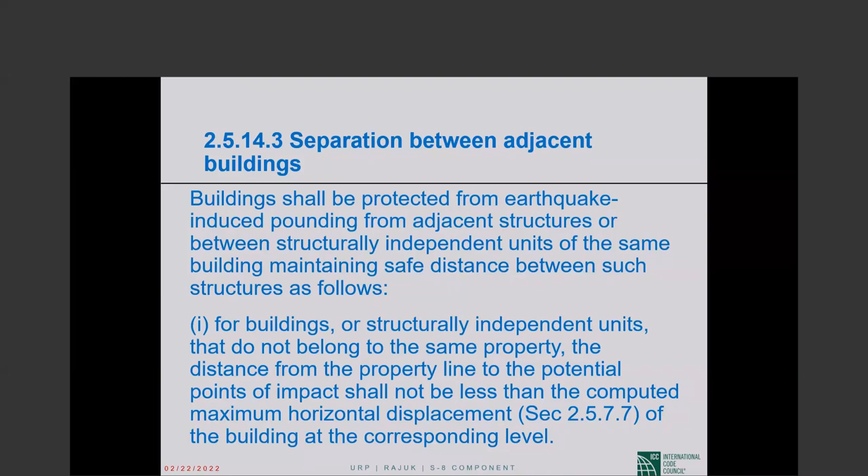The second item, for buildings or structurally independent units belonging to the same property, if the distance between them is not less than the square root of the sum of the squares of the computed maximum horizontal displacements of the two buildings or units at the corresponding level. So this is exactly the same as ASCE 7-10. Separation distance is square root of the sum of the squares of the deflection at the roof level of the shorter building and the deflection at the corresponding level of the taller building.

Okay. Now, this square root of the sum of the squares concept is in BNBC ahead of ASCE 7-10. I wanted you to see that. And once again, we are not talking about delta sub M1 of ASCE 7, including torsion. This is the horizontal displacement. It may not include torsion. Then that is what I found the most interesting, and the reason that I thought that I had to show all of this to you is item number 3.

If the floor elevations of the building or independent unit under design are the same as those of the adjacent building or unit. Okay, please let me read that again. So if the floor elevations of the building or independent unit under design are the same as those of the adjacent building or unit, the above referred minimum distance may be reduced by a factor of 0.7.

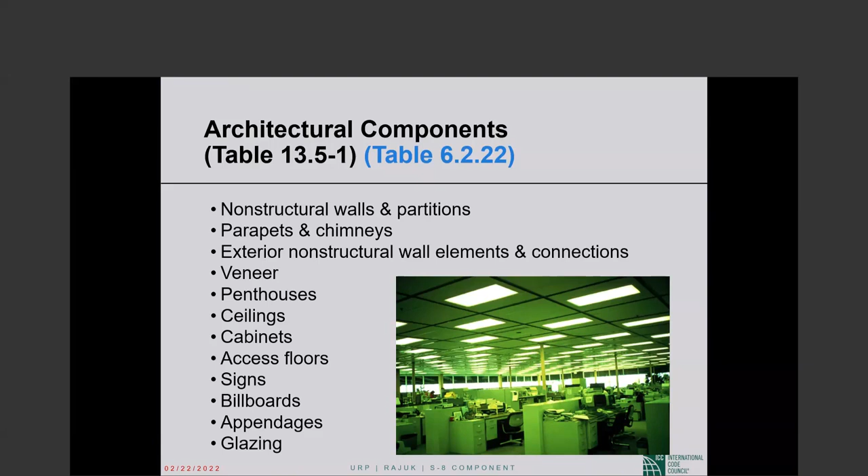Parapets and chimneys, these are roof-mounted chimneys. Exterior non-structural wall elements and connections, veneer, penthouses, ceilings, cabinets, if the cabinets are attached to the structure. Otherwise it will be treated as furniture, and furniture is typically not considered a non-structural component. It is when they are attached to the structure or braced against the structure that we do consider them. Access floors, signs, billboards, appendages of various kinds, and glazing or glass, a very important architectural component.

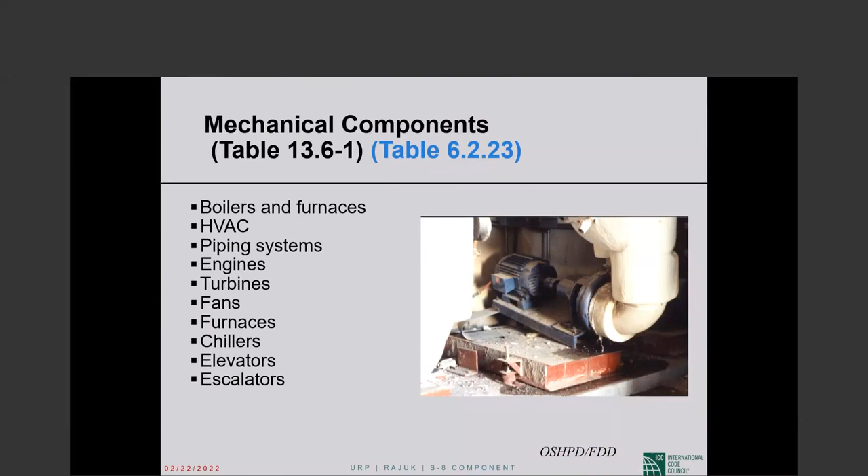Mechanical components are listed in Table 13.6-1, a very important table: boilers and furnaces, HVAC—heating, ventilating, air conditioning—could be ducts, could be equipment, piping systems, engines, turbines, fans, furnaces, chillers, elevators, escalators, all of that are mechanical components. Electrical conduits, bus ducts, cable trays, lighting, the lighting fixtures.

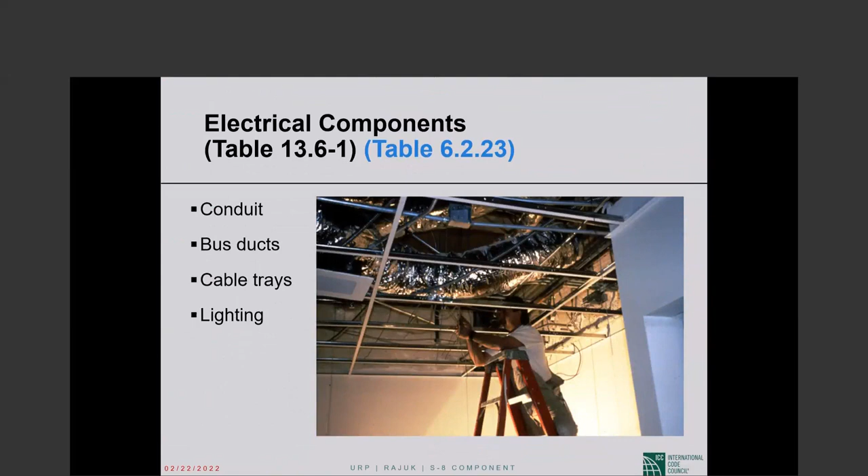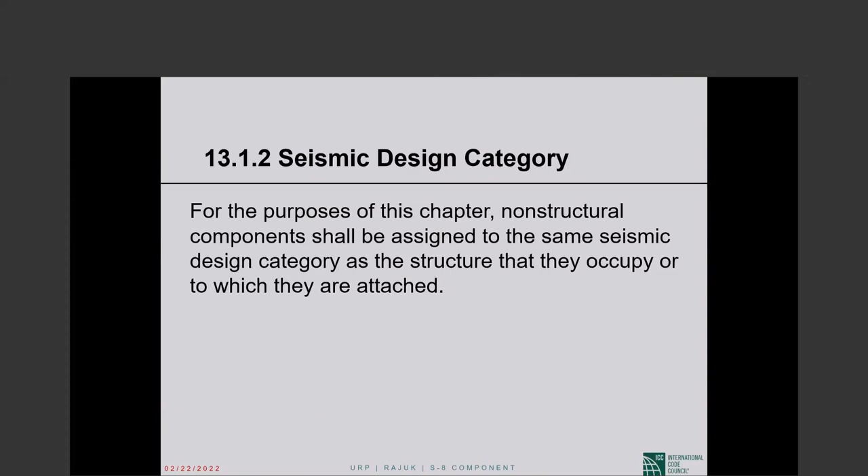Now, at the beginning of chapter 13, and the same is true in BNBC—in BNBC it is 2.5.15, as you see—there are a number of exemptions.

That's pretty much where the chapter starts, where the requirements do not apply. And that is a very important list because it is only the other non-structural components that you need to design using chapter 13. So there is, to start with, a list of non-structural components that need not be designed using chapter 13 of ASCE7 or 2.5.15 of BNBC 2020.

Okay, so this section establishes minimum design criteria for non-structural components that are permanently attached to structures and for their supports and attachments. So this is non-structural components permanently attached to the structures—this is not furniture, as I said—and for the supports and attachments of those non-structural components. If they're attached to the structure, the attachment has to be designed.

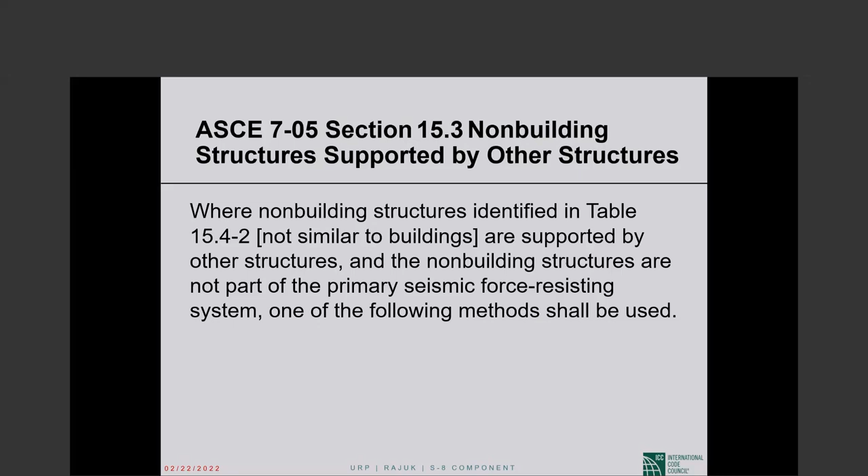So where non-building structures that are not similar to buildings are supported by other structures, okay, could be a chimney, and the non-building structures are not part of the primary seismic force resisting system, then one of the following methods shall be used. I'll take you only through the first part. The second part is a little too complicated, and I'll leave it to you to read if you're interested.

For the condition where the weight of the non-building structure, so we are talking about a non-building structure supported on another structure, for the condition where the weight of the non-building structure is less than 25% of the combined weight of the non-building structure and supporting structure...

Okay, this is the important part. Where the weight of the non-building structure is less than 25% of the combined weight of the non-building structure and supporting structure, the design seismic forces of the non-building structure shall be determined in accordance with Chapter 13. See, this is where it sends you. Chapter 15 sends you to Chapter 13, where the non-building structure has a weight that is less than 25% of the combined weight.

So it shall be determined in accordance with Chapter 13, where the values of R sub P and A sub P shall be determined in accordance with Section 13.1.5, which we looked at. Anyway, the rest of it may or may not be all that terribly important, and I will not take you through the case where the non-building structure weighs more than 25% of the combined weight.

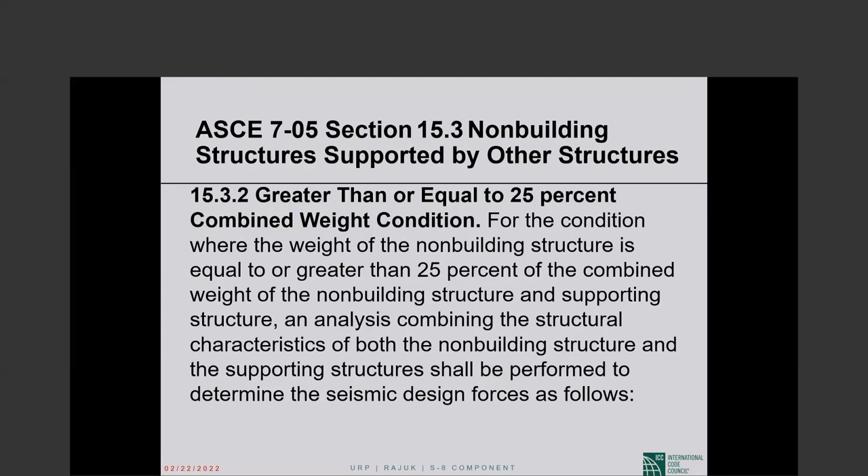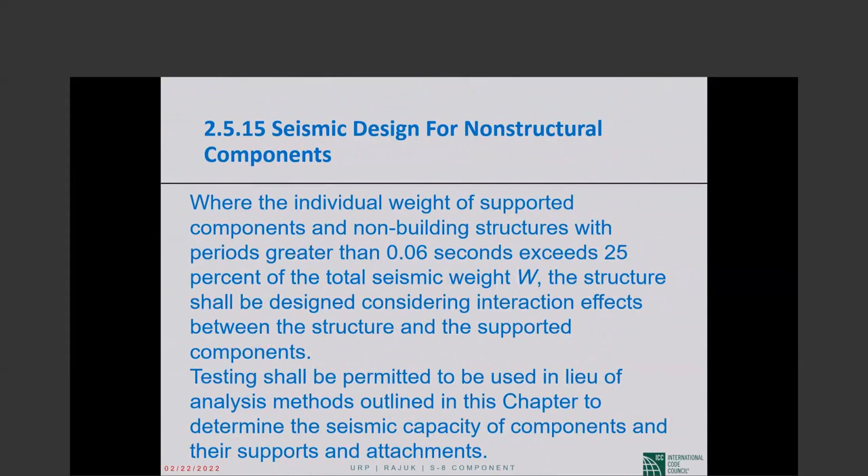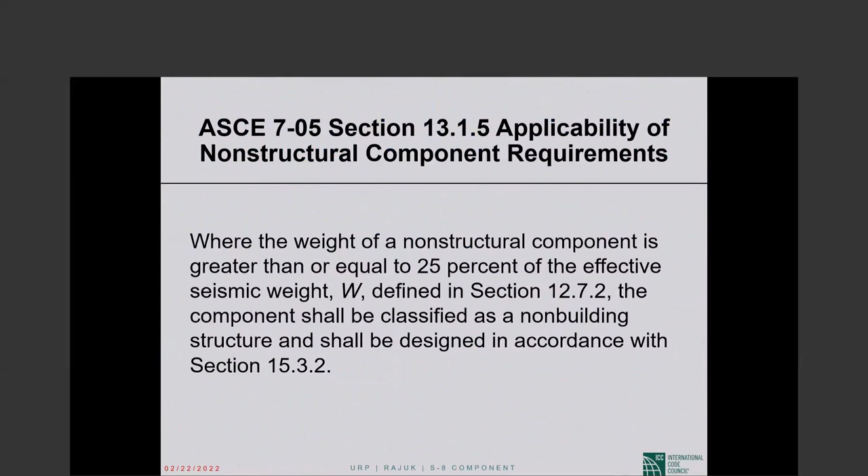So where the non-building structure weighs more than 25% of the combined weight, I will not take you through that, but there is provision for it. I wanted you to see that, instead of this vague provision in BNBC 2020, ASCE 7 has very clear, distinct provisions for both non-structural components and non-building structures. These are kind of interrelated, and I think that's probably enough on this topic.

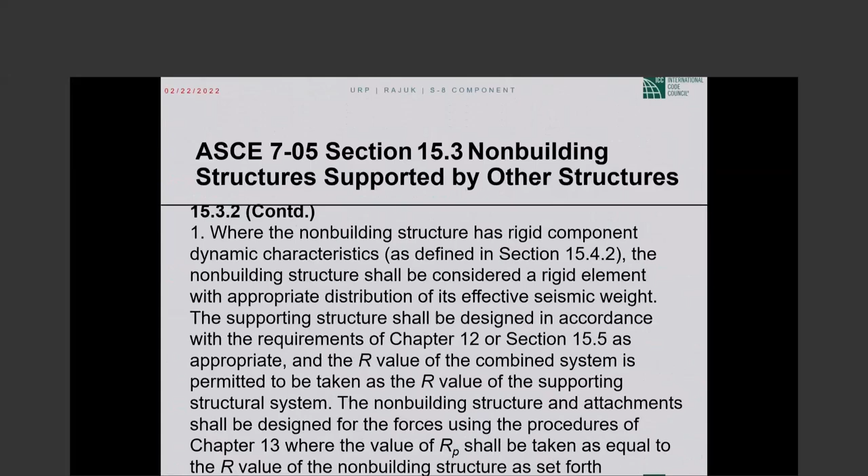But the exemptions are very important, and what I just took you through is also important. You cannot start designing a non-structural component without figuring out if it is exempt, because then you'll be wasting time. Also, you cannot start running numbers until you've figured out some of the things we discussed, like whether the non-structural component is too heavy, in which case we may have to go to chapter 15 for our design, not chapter 13.

With those things settled, let us get into chapter 13, the non-structural component design chapter. If you consider the exemptions, then what that leaves for us to design are parapets in design category B, all parapets, and architectural components in design category B when I sub P is larger than 1.

So in seismic design category B, the only architectural components that we need to design by chapter 13 are parapets and architectural components with I sub P larger than 1. If the design category is C, all architectural components must be designed by chapter 13. Electrical and mechanical components must be designed, but only if I sub P is larger than 1.

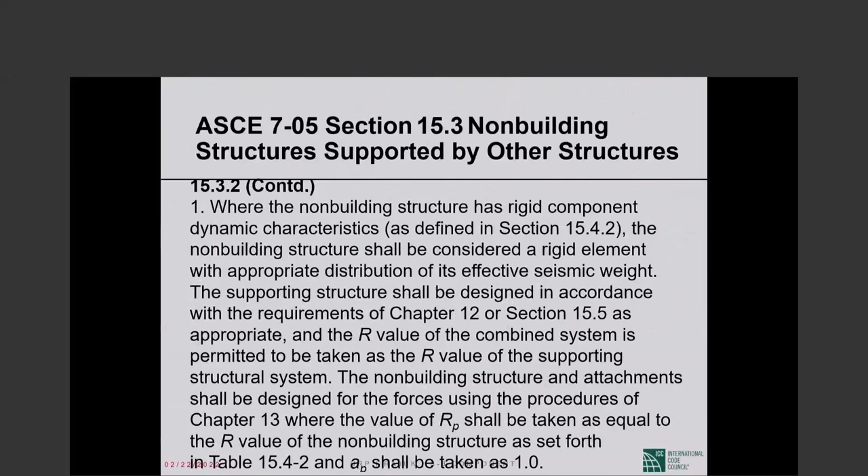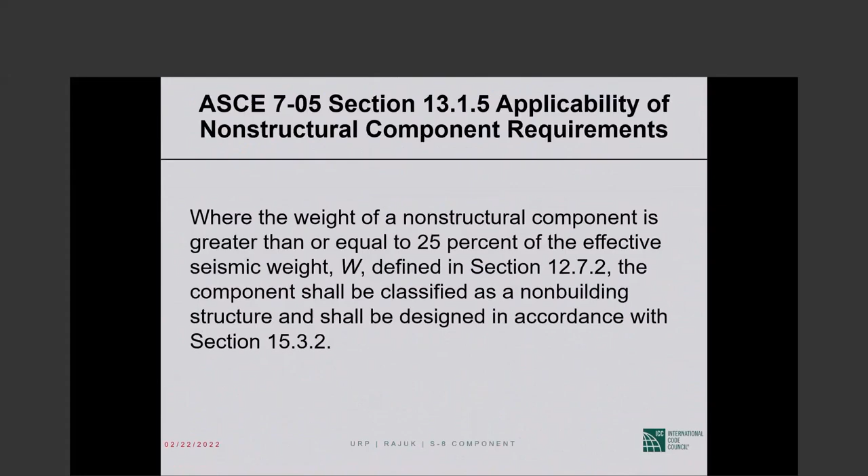Design categories D, E, and F: architectural, mechanical, electrical, all non-structural components basically always shall be designed by chapter 13. We say basically always because there were those exemptions 4 and 5, remember? These exemptions are there for the high seismic design categories, but those are not broad exceptions, they're kind of narrow. So this is why we say basically always.

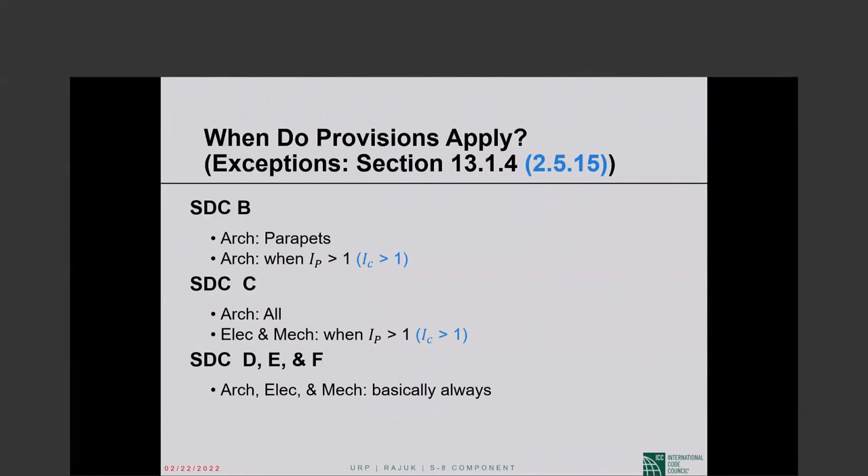So design category B: parapets have to be designed using chapter 13, other architectural components provided I sub P is larger than 1. Design category C: all architectural components, electrical and mechanical only when I sub P is larger than 1. Design categories D, E, and F: basically all architectural, mechanical, electrical components.

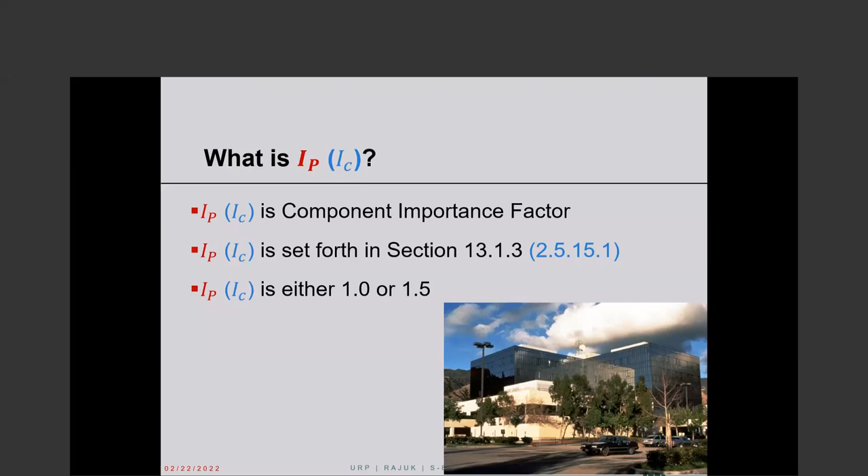Now the I sub P that keeps coming up - as you have seen, it is very important. It dictates many times whether we have to design a component by chapter 13 or can forget about design. I sub P is the component importance factor, given in section 13.1.3 of ASCE 7. I've given you the corresponding BNBC section number. I sub P is either 1 or 1.5. I for the structure can have 3 values: 1, 1.25, or 1.5. I sub P for parts and portions has only 2 admissible values, 1 or 1.5.

This is the section where you determine I sub P, component importance factor. The factor shall be taken as 1.5 if any of the following conditions apply: 1, the component is required to function for life-safety purposes after an earthquake, including fire protection sprinkler systems. 2, the component contains hazardous materials which when released can do harm to the public. And 3, the component is in or attached to an occupancy category 4 structure - those are essential facilities and hazardous facilities - and is needed for continued operation of the facility, or its failure could impair the continued operation of the facility.

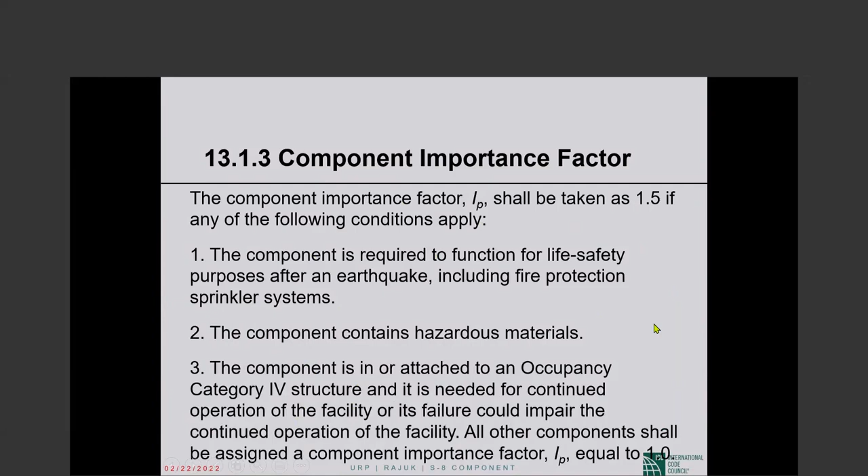I sub P shall be taken as 1.5 if any of those conditions apply. All other components shall be assigned an I sub P of 1. So I sub P is 1.5 when those conditions are met - it's not exactly an essential facility, but the component is needed for continued functioning of a facility. The language is clear. Otherwise, I sub P is equal to 1.

What force do you need to design a component for? The component design force is F sub P. That notation is common between ASCE 7 and BNBC, F sub P.

Maybe it is F sub C, in BNBC. So the component design force is 40% of S sub ds. S sub ds, remember, is short period design spectral acceleration. If we divide that by 2.5, or multiply it by 0.4, we get design level peak ground acceleration. This we have discussed many times before. So we are talking about the peak ground acceleration

multiplied by a dynamic amplification factor, A sub P, times the weight of the component, W sub P, divided by R sub P, component response modification factor, and then I sub P is the importance factor we have been talking about. So it's basically 0.4 S sub ds times W sub P, the peak ground acceleration multiplied by the weight of the equipment.

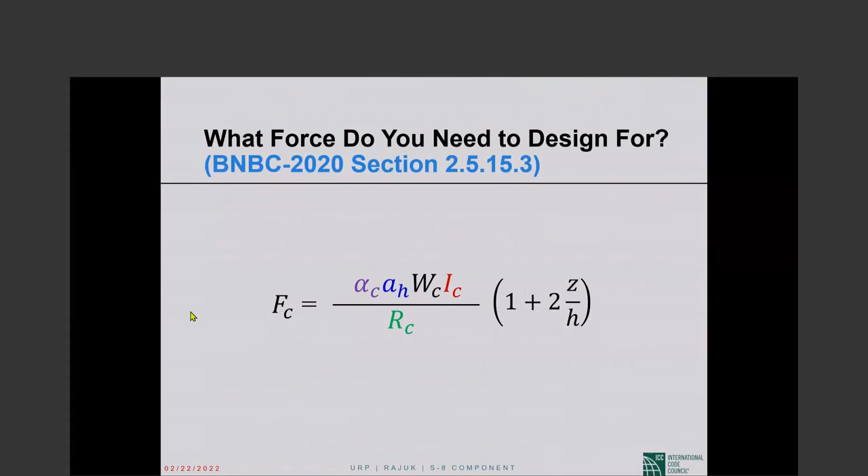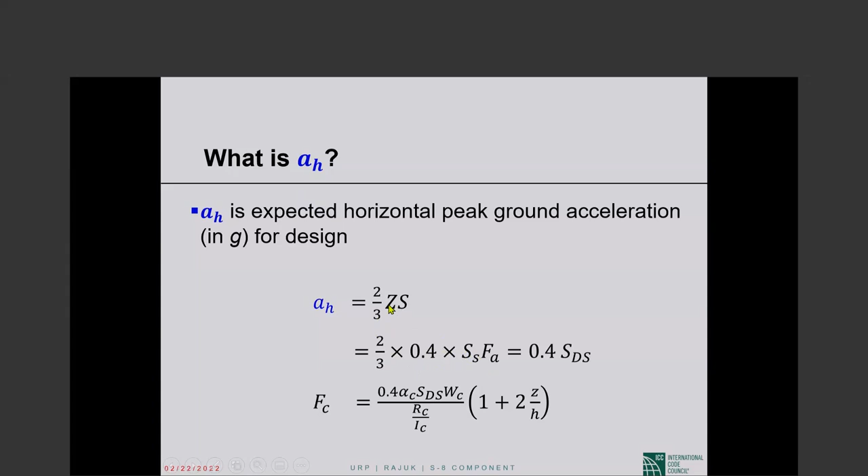And then 1 plus 2 Z over H is the same as in the ASCE7 formula. So this A sub H takes the place of 0.4 S sub ds, and here I'm showing you that that is the case. A sub H, in fact, is equal to 40% of S sub ds. A sub H in BNBC is given by this expression, 2/3 Z times the soil factor S. The soil factor S of BNBC is F sub A of ASCE7, and the Z is 40% of S sub S. Z is MCE level acceleration. This is why it is 40% of S sub S, not S sub ds.

So 2/3 of Z, which is 40% of S sub S, times the soil factor S, which is the short period site coefficient F sub A, and all of that, 2/3 of S sub S times F sub A, is S sub ds. So A sub H is actually equal to 40% of S sub ds. So there is absolutely no difference between the BNBC formula and the ASCE7 formula, if you remember that alpha sub C is A sub P, and in all other cases, the subscript C is subscript P of ASCE7.

So what is A sub P? That's the dynamic amplification factor. It is given in table 13.5-1 for architectural components and table 13.6-1 for mechanical and electrical components. R sub P is given in those tables, and A sub P is also given in those tables, 13.5-1 for architectural, 13.6-1 for mechanical and electrical. A sub P is either 1 or 2.5, with just one exception, just so that you know. There is either no dynamic amplification or there is significant dynamic amplification, 1 or 2.5, with one exception. I did not reproduce table 13.5-1; it is easy enough for you to look up. I think I gave you the corresponding BNBC table number.

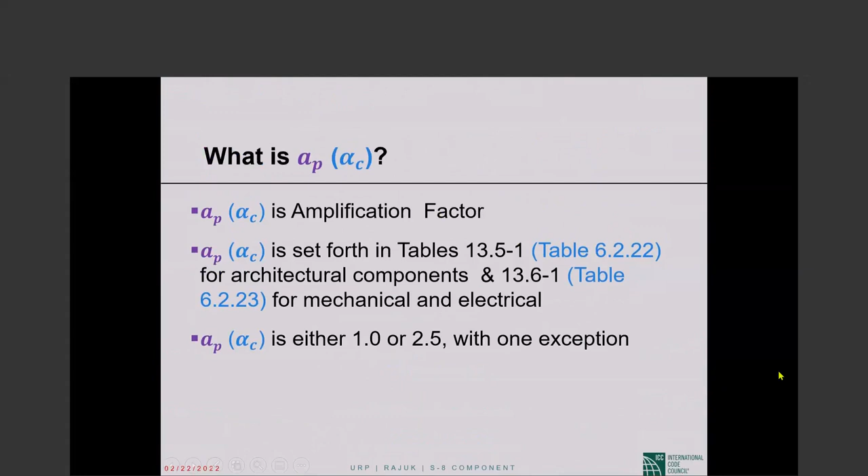Anyway, that's where it comes from, and it is 1 or 2.5. That's obviously important.

Okay, now we will discuss the variation along height that we, in a way, already discussed. So at the base of the structure, the peak acceleration is 40% of S sub ds. I said base of the structure, technically 40% of S sub ds is at the ground level. Base is a defined term in ASCE 7.

This is where seismic forces are imparted to the structure. Seismic ground motion is imparted to the structure. This is how it is defined. It is up to the engineer to decide what the base of his structure is.

Now, if it is a structure on level ground, the ground level is typically chosen as the base. But 40% of S sub ds is peak ground acceleration, and that would typically be the acceleration at the base.

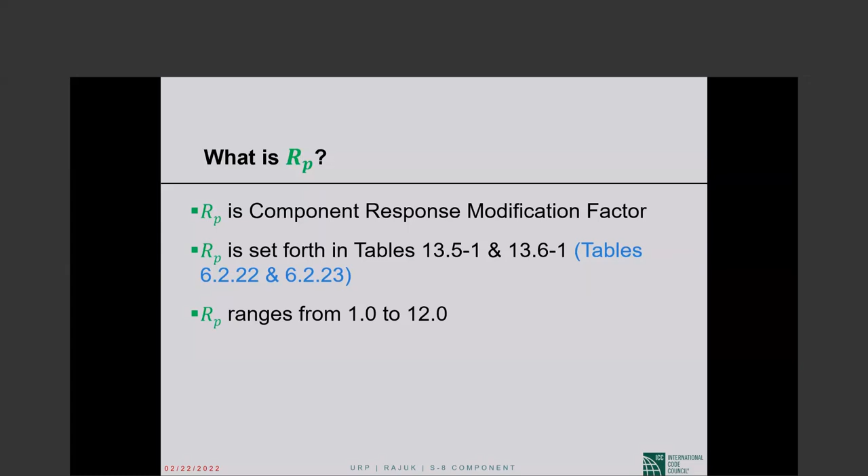Okay, so in those tables, the architectural, mechanical, electrical components that I showed you earlier in the 3 earlier slides are listed, and their A sub P and R sub P values are given.

Now ASCE tells you a couple of things that you need to understand and keep in mind, and same language or very similar language is also in BNBC. The force F sub P shall be applied independently in at least 2 orthogonal horizontal directions in combination with service loads associated with the component as appropriate.

That's what should be done. But when you are designing a parapet, it is the out of plane direction that counts. In plane, this F sub P will not do anything. It will basically have no consequence.

It's a long thing. Anyhow, I want to say that in principle, yes. In reality, it may, depending upon what you are doing, it may not be necessary to apply the force, as it says, in at least two orthogonal horizontal directions.

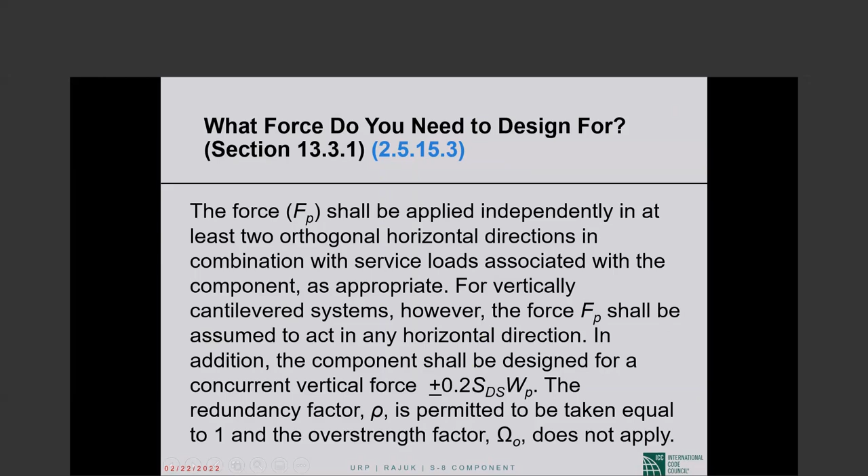What you are designing will dictate exactly how you implement that requirement. Where non-seismic loads on non-structural components exceed F sub P, such loads shall govern the strength design. So let's say on a parapet you have out of plane wind, you have the F sub P acting out of plane. The wind may very well govern in high wind areas, and you will design for strength required for the wind, no question about it.

Okay, so where non-seismic loads on non-structural components exceed F sub P, such loads shall govern the strength design, but the detailing requirements and limitations prescribed in this chapter shall apply. And this is like structure. The strength will have to be whatever requires the strength, but if your seismic design category is high, it will do the required detailing.

Okay, so component design force. I hope the requirements are clear. It's actually conceptually without any complication, as far as I'm concerned.

40% of S sub DS is the peak ground acceleration, design level peak ground acceleration. We multiply that by the weight of the component. So mass times acceleration is a force. That's what we get. We have our component design force. That's the basic part: 40% S sub DS W sub P.

Now there is a possible dynamic amplification depending upon what we are designing. Dynamic amplification would be like higher mode effects. And there is the possibility of a response modification factor if the response is going to be inelastic. That's where A sub P and R sub P come from. I sub P makes sure that we design important components for higher force.

It's that simple. If a component is going to be needed for fire recovery after an earthquake, we better design it for 1.5 times the force that we would use in the design of ordinary components. And then all of that gives us the connection force for a piece of equipment mounted on ground.

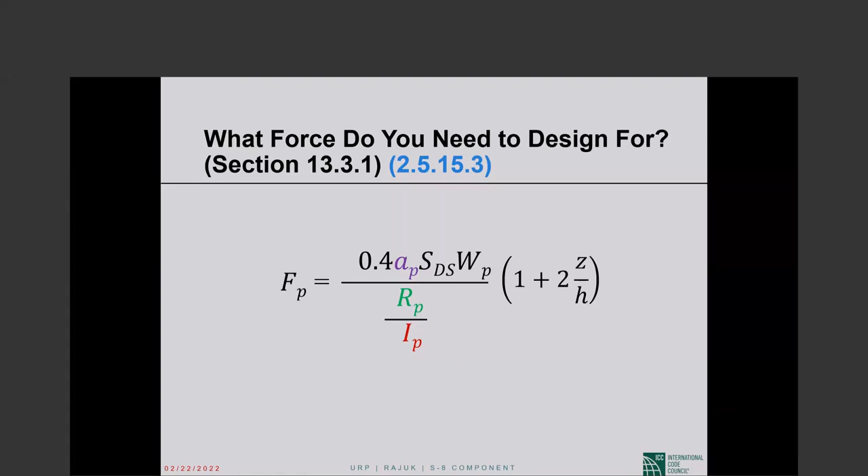Okay, so the equation makes basic sense. The A sub P and R sub P are given in tables, making it easy. And I sub P determination we have talked about. So there is not much else that is in ASCE 7 or BNBC.

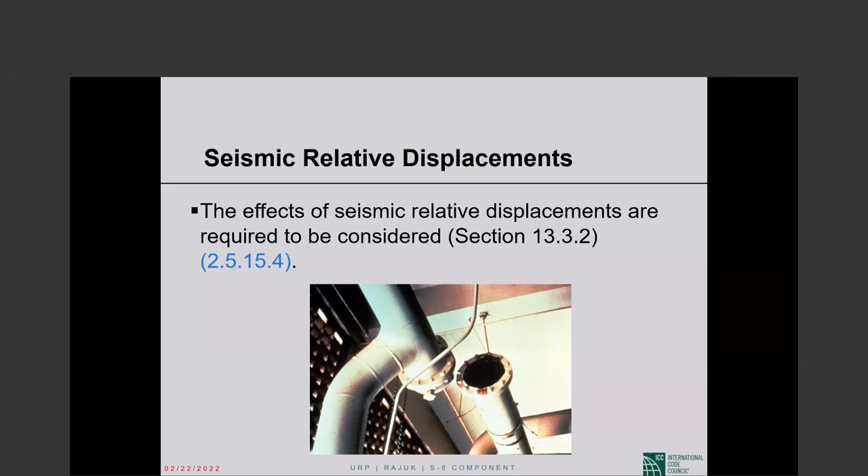Now that is the force. There are some things like piping and so forth where the component design force is not important. What is important is seismic relative displacement that has to be accommodated by the piping or whatever we are designing. The effects of seismic relative displacements are required to be considered. That's what section 13.3.2 of ASCE 7 says, and the corresponding section number in BNBC is that.

So this is section 13.3.2. The effects of seismic relative displacements shall be considered in combination with displacements caused by other loads as appropriate. So it's not only seismic that may cause displacements. Other loads may also, so we consider it in combination with displacements caused by other loads.

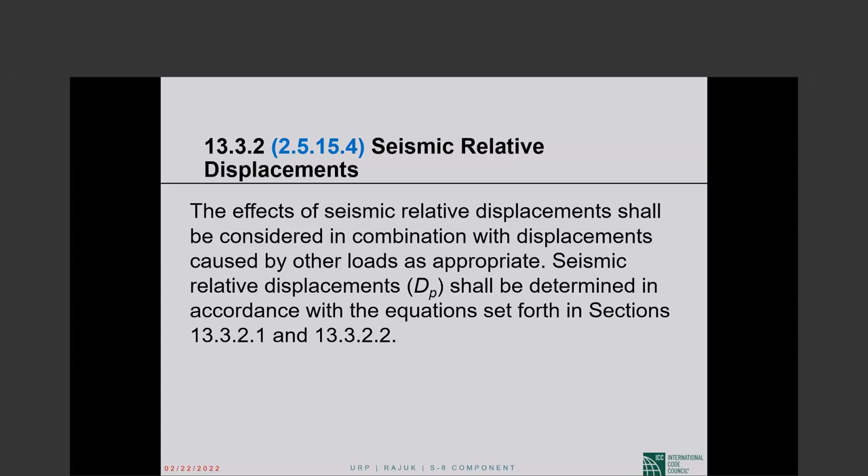Seismic relative displacements, the notation is capital D sub P, shall be determined in accordance with equations set forth. So equations are given for D sub P. This is very likely D sub C in BNBC. Okay, so please follow this.

So for 2 connection points on the same structure A, piping or whatever we are designing is attached to the same structure at 2 connection points, one at a height h sub x and the other at a height h sub y. D sub P shall be determined as delta sub x A minus delta sub y A. A is for the structure. So D sub P is delta sub x minus delta sub y, as simple as that.

For 2 connection points on the same structure, one at a height h sub x, the other at a height h sub y, D sub P shall be determined as delta sub x minus delta sub y.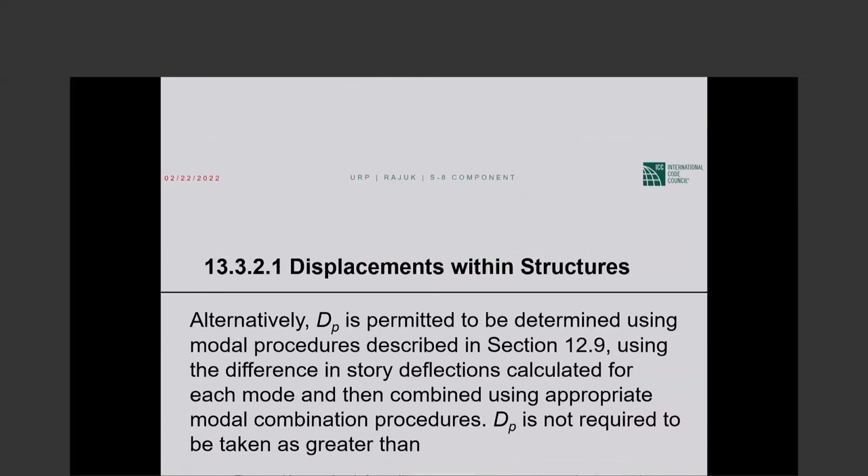Alternatively, D sub P is permitted to be determined using modal procedures described in section 12.9. I took you through one full day on modal analysis, remember. Using the difference in story deflections calculated for each mode, then combined using appropriate modal combination procedures. D sub P is not required to be taken as greater than, okay?

So D sub P you calculate, and D sub P is not required to be taken any greater than—or simpler language would be, D sub P need not be any larger than. Let's see what this is. H sub X is the height to the first attachment point, H sub Y is the height to the second attachment point. So H sub X minus H sub Y is the vertical distance between the 2 points, okay?

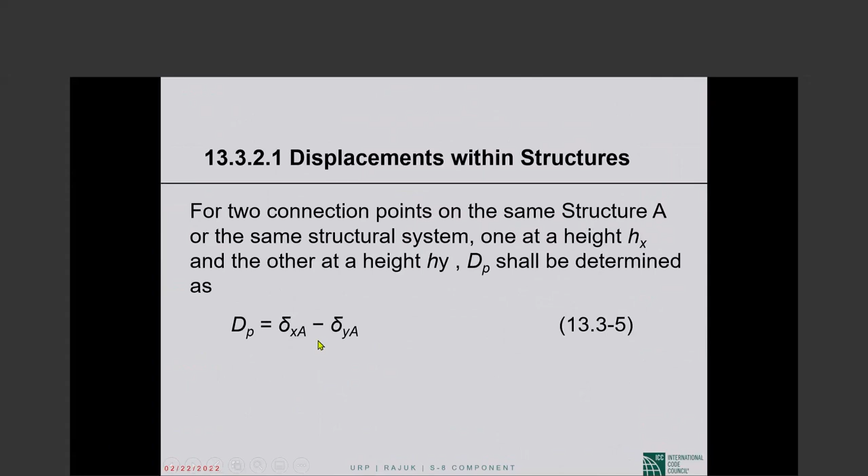So D sub P you will calculate as here, or by modal analysis procedure, but it need not be taken any larger than the right hand side. So that is attachment to the same structure.

For two connection points on separate structures A and B, one at a height H sub X and the other at a height H sub Y, D sub P shall be determined as the absolute value of delta sub X, which is on structure A, and delta sub Y, which is on structure B. So we have the attachment point at H sub X moving, and the attachment point at H sub Y also moving. We take the horizontal movements and sum them up, as absolute values, because the movement is in both directions.

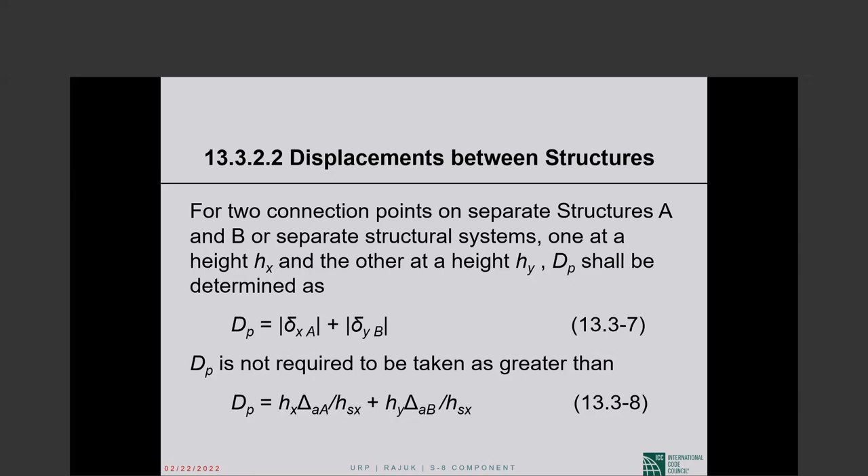We take the absolute values of the two and add them together. This D sub P need not be any larger than, same thing, we take the deflection limit, the allowable interstory drift, divide that by the story height, multiply by H sub X. H sub X is the height to where the first attachment is. Similarly, we take delta sub AB, the allowable story drift of structure B, divided by the story height, multiplied by the height to the point where the second attachment point is. I think if you read this, it will be clearer than I probably was able to make it. I think everything makes sense when you read.

So a component has to be designed for the force that we looked at. Depending upon the component, a more critical combination consideration may be that you will have to accommodate the relative displacement D sub P when you design glazing or glass. It is the relative displacement that becomes important. That has to be kept within tolerable limits given in ASCE 7. So whether the force or the displacement is more important depends on what it is that you are designing.

And then the attachment of the non-structural component to the structure, that obviously is important. You have to design that attachment as well. So the section is 13.4 in ASCE 7, 2.5.15.2 in BNBC. I took the first two lines from BNBC because it's simpler, and then ASCE 7 language, which is very, very similar to what you have in BNBC. Components shall be attached such that the component forces are transferred to the structure. Very simple, conceptually and practically, that's what we have to do.

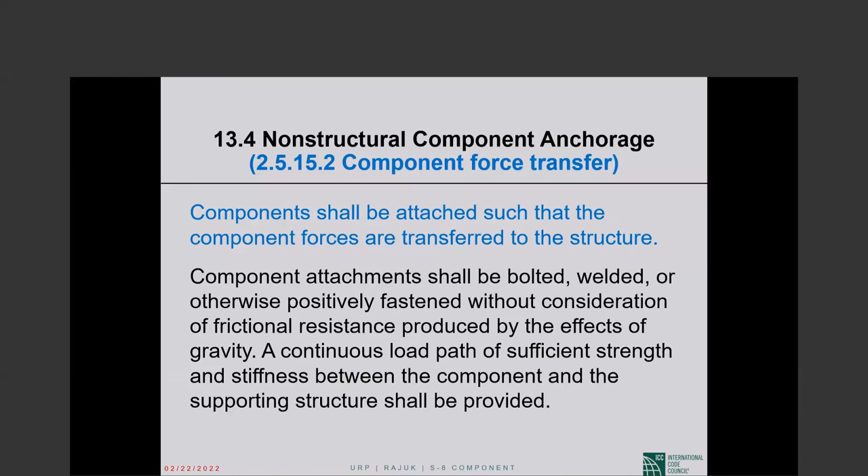The section goes on, and this part may be a little less simple to quickly follow. So local elements of the structure on which the component is attached, it could be anything, but it is not the main columns, beams, shear walls. Local elements of the structure, including connections, shall be designed and constructed for the component forces where they control the design of the elements or their connections. It's not always that the force is controlling, it could be deformations, but anyway, the component forces shall be those determined in the section such and such.

We looked at that, except that modifications to F sub P and R sub P due to anchorage conditions need not be considered. So you take the component forces calculated from the formula that I showed you. Modifications to F sub P and R sub P due to anchorage conditions need not be considered. The design document shall include sufficient information relating to the attachments to verify compliance with the requirements of this section. Anyway, this may require more than one reading, but there is nothing that I think is confusing.

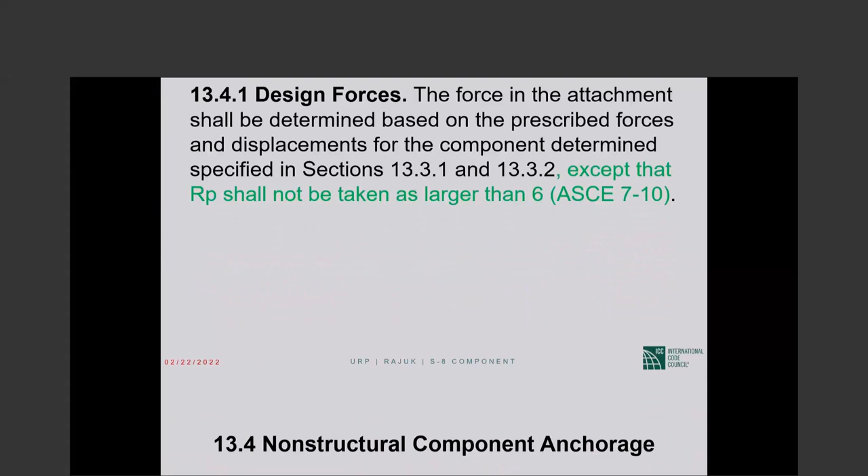The next subsection, very important under attachments, is anchors in concrete or masonry. Masonry I have not reproduced, but for anchors in concrete, ASCE 7-05 has 4-5 provisions. If you read them, you are liable to be confused. In ASCE 7-10, we switch to this requirement: anchors in concrete shall be designed in accordance with Appendix D of ACI 318, the anchorage appendix. Anchoring to Concrete is the title of Appendix D.

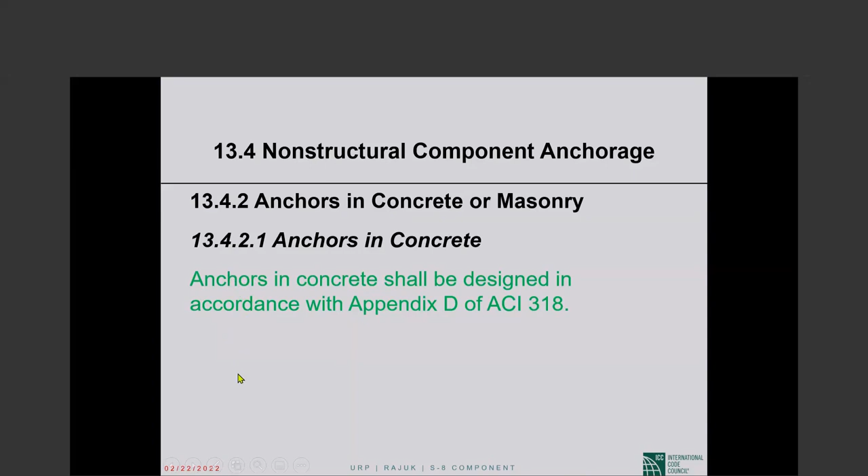So that takes care of everything that ASCE 7-05 was telling us to do. This is a very, very important requirement when you attach a non-structural component to a structure. The anchors shall be designed using ACI 318 Appendix D, and that will give you ductile anchor failure. ACI insists on the steel failing rather than concrete in anchor design, and the steel failure has to be ductile failure. There are a couple of alternatives to that, but that kind of failure mode is very, very important. So to me this is an extremely important requirement, that the anchors must be designed by ACI 318.

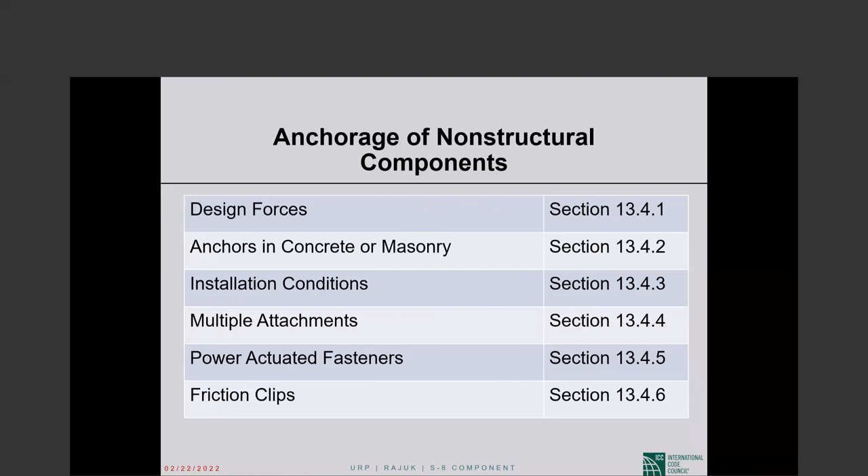Now, beyond anchor design forces, for anchors in concrete or masonry, there are other provisions you need to look at in ASCE 7: installation conditions, multiple attachments, power actuated fasteners, and even friction clips. There is good commentary on friction clips with a picture - good ASCE 7 commentary. So as far as anchorage of non-structural components, there is quite a bit said in ASCE 7-05.

In ASCE 7, a big item is special certification. I didn't quite find it in BNBC - that doesn't mean it is not there, I may not have found it. Special certification is required for many equipment. Let's look at this. Hospital equipment - a hospital will not buy equipment that does not have special certification on it. It's as simple as that. So this is a very important requirement of ASCE 7 that is adopted by the IBC and practiced across the United States.

So where in the code do you find special certification requirements? In ASCE 7-05, it is section 13.2.2. This is in the IBC as well. I went back to 2009 IBC because that's more like BNBC 2020, and the section where you find special certification is 1708.4. Chapter 17 is on inspection and testing.

What does certification apply to? For what do you have to have special certification? Design category C through F, mechanical and electrical equipment with I sub P larger than 1. This is very, very important stuff. Design category C through F, mechanical and electrical equipment, all mechanical electrical equipment that has I sub P larger than 1. Also, design category C through F components with hazardous contents that have I sub P larger than 1.

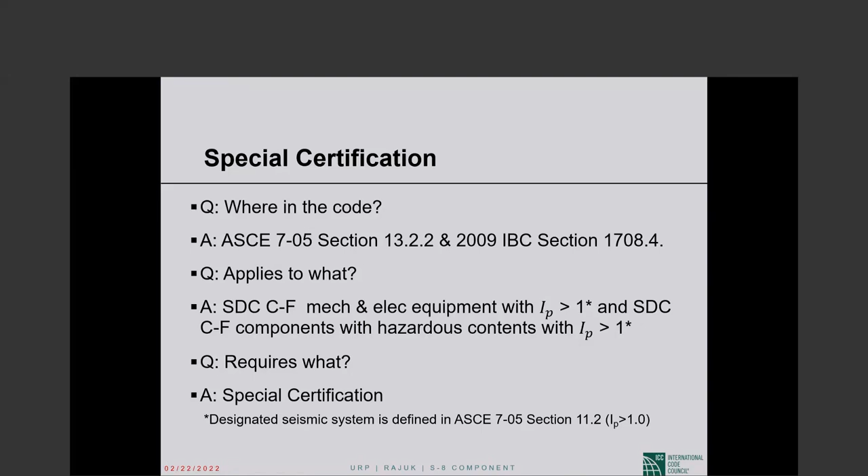So what is required for special certification? What basically is this special certification? For mechanical and electrical equipment, show that the equipment remains operable following design earthquake, and this showing has to be by shake-table testing in accordance with such and such, experience data in accordance with 13.2.6, or analysis. So the basis can be shake-table testing, experience data that would be acceptable to the building official, or analysis.

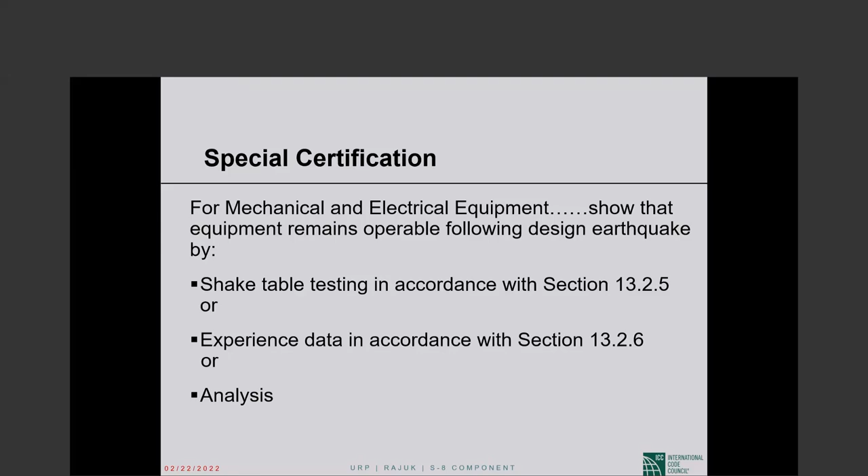The analysis choice is kind of restricted - you cannot always use it. But anyway, the purpose of the shake-table testing and so forth is to show that the equipment remains operable following design earthquake. The special certificate will state exactly that. For components with hazardous contents, show that containment is maintained - the material will remain contained following design earthquake. And you shall also show this by shake-table testing, experience data, or analysis.

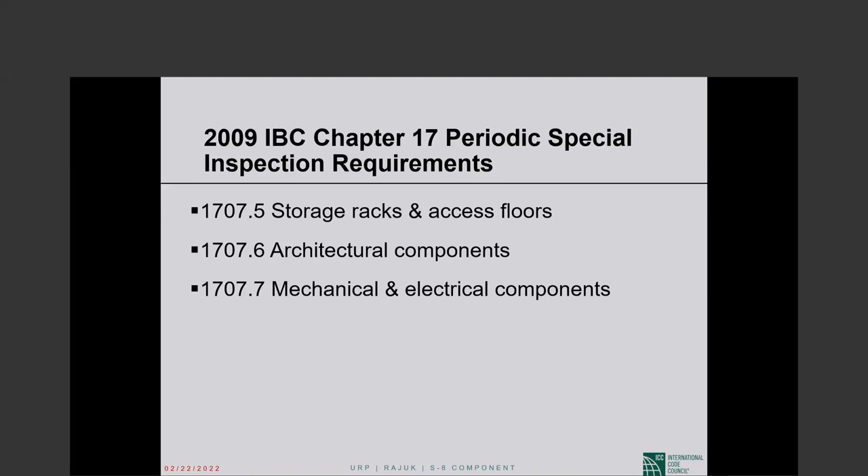On top of everything we discussed, IBC has special inspection requirements for some of this stuff. For storage racks and access floors, periodic special inspection is required—periodic meaning from time to time as opposed to continuous. For architectural components, also periodic special inspection. And for mechanical and electrical components, periodic special inspection. I have given you the IBC section numbers—those are 2009 IBC section numbers—so you can see what the requirements are.

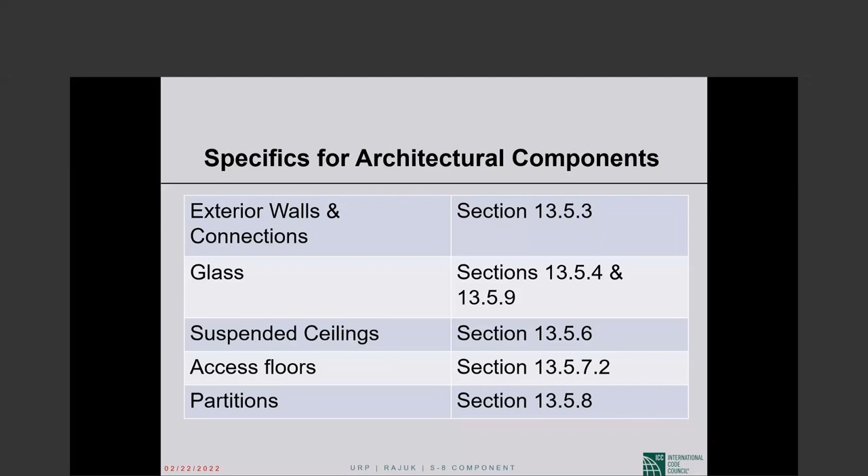So it is a pretty comprehensive package. Beyond the general requirements—the design force, the relative displacement, the tables giving us A sub P, R sub P—there are specific requirements for many non-structural components in chapter 13 of ASCE 7. Those things for which we have specific provisions are exterior walls and connections, glass, suspended ceilings, access floors, partitions. Those are all architectural components. Mechanical and electrical components for which we have specific provisions in ASCE 7-05 are utility and service lines, HVAC ductwork, piping systems, boilers and pressure vessels, elevators and escalators.

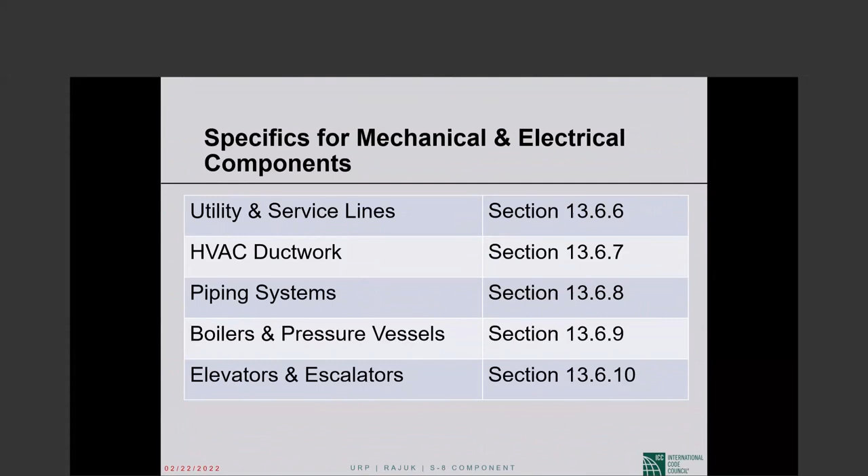Okay, so that brings us to a point that is, I think, very logical for our break. We will come back at 9:35 precisely and go into the non-building structures.

Dr. Ghosh—yeah, so I think you will finish quite early today because there's not much left after this, right? I don't know, we'll see. Could happen, it should be good. Yeah, then I was thinking I will leave the questions and answers for you today. Oh, whatever you like. I don't know, how many slides left? Let me check, there are not many slides left after this. Yeah, anyway, if it is early, that would be good. Yeah, I think 29, 30 slides. Yeah, it probably won't be that early, but probably a little early. Yeah, yeah, okay, yeah, okay.

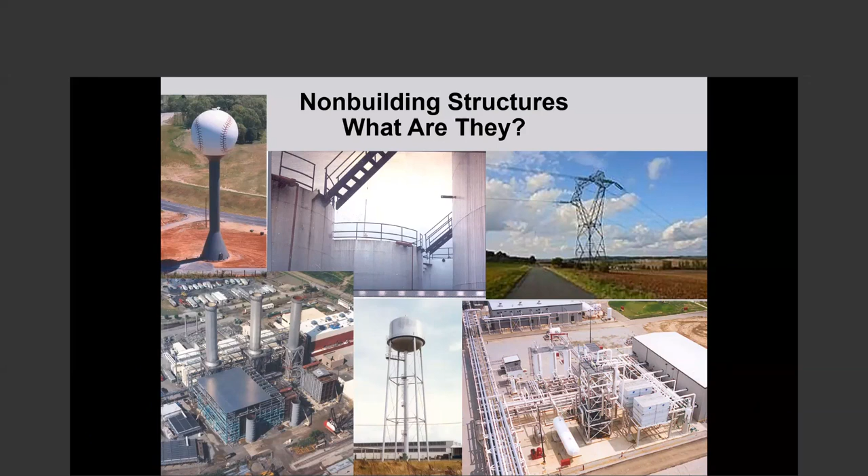Everything in the picture—it can be just a tank, one individual tank. It could be a transmission tower like that, or it could be an entire facility, an entire refinery. A refinery would have multiple non-building structures in it.

BNBC simply does not cover non-building structures, important as they are. This is what is in BNBC 2020—section number 2.5.18. Calculation of seismic design forces on non-building structures such as chimney, self-supported overhead water/fluid tank, silo, trussed tower, storage tank, cooling tower, monument, and other structures not covered in section 2.5 shall be in accordance with chapter 15, seismic design requirements for non-building structures, of minimum design loads for buildings and other structures. So ASCE 7-05 chapter 15 is where you are being directed, complying with the requirements of section 2.5 of this code.

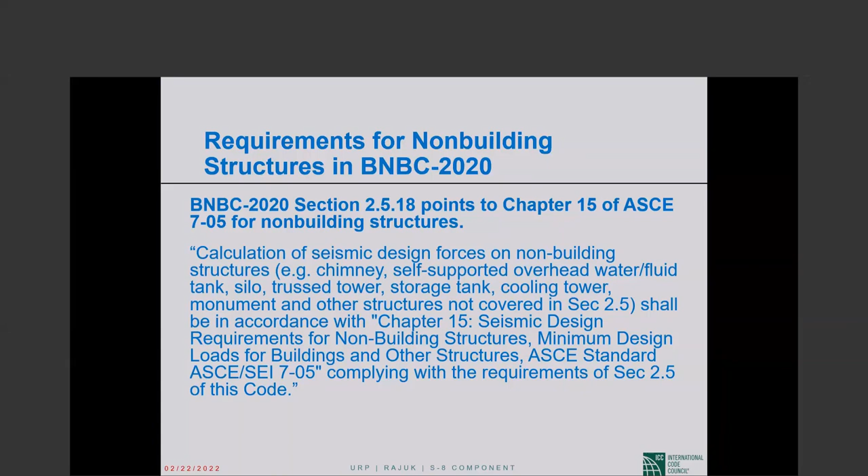So when it comes to design, there is no difference between section 2.5 and ASCE 7 anyway. In other words, BNBC directs you to chapter 15 of ASCE 7.

The electrical transmission tower is kind of illogical for ASCE 7 not to cover, but that is because of political reasons—the powerful interests didn't want ASCE 7 to cover them. Be that as it may, ASCE 7 tells you in black and white that those particular non-building structures, which definitely includes all bridges, are not covered by ASCE 7-05.

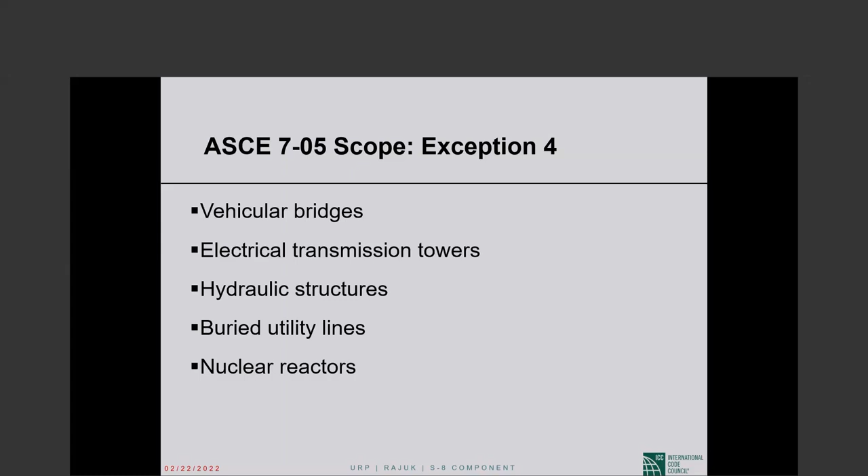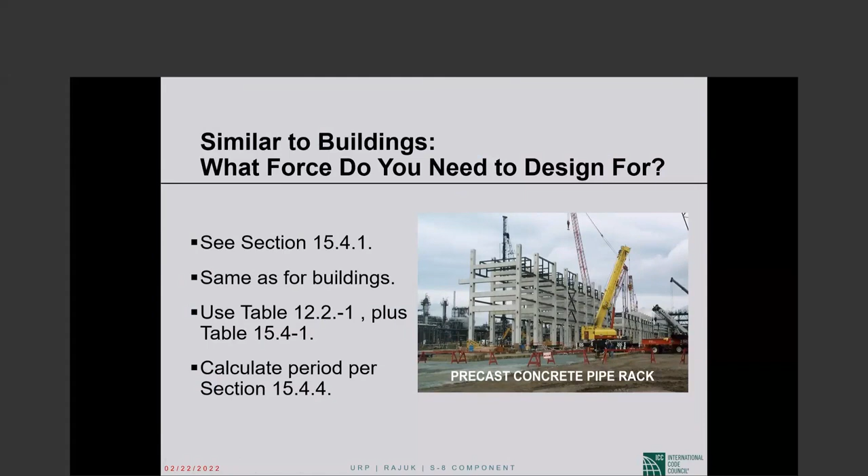In this table, that applies to non-building structures similar to buildings, we have done something that is not done anywhere else in ASCE 7. There is a trade-off allowed between height limit and R value. Okay, let me try to explain. So the system here is ordinary steel concentrically braced frame.

Ordinary concentrically braced frame of steel - ordinary as opposed to special. The usual R value is 3¼, omega sub 0 is 2, C sub D is 3¼. No height limit up to design category C, but then 35 feet only for design categories D and E, and not permitted in design category F.

Okay, now you can definitely use that line, but then you have to deal with a 35-foot height limit in design category D. That may not serve your purpose. So we are being offered two alternatives. You can take the penalty of using R of 2½ rather than 3¼ - that will increase your design force. So your new set of parameters should be R of 2½, omega sub 0 of 2, and C sub D of 2½. Design category up to C, there is still no limit, but look at this - design category D, you now get to go up to 160 feet of height.

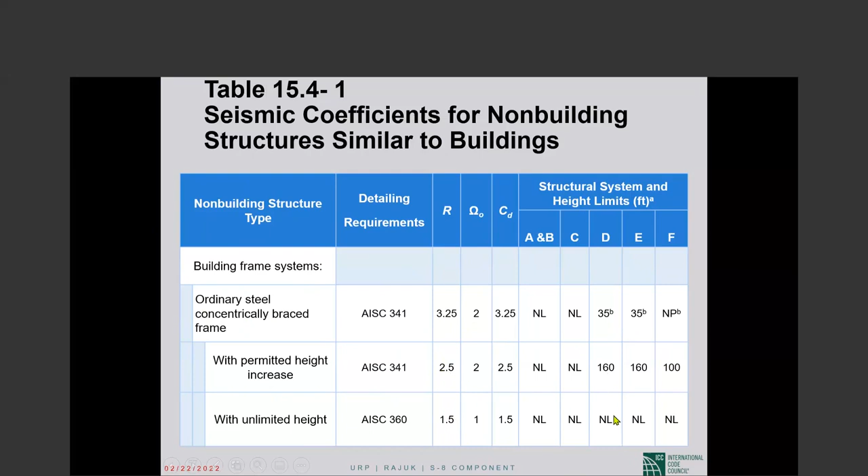With this system, you have a choice of an R of 3.25, which will give you a 35-foot height limit in design category D, or an R of 2.5, which will take your height limit in design category D to 160 feet, or if you are prepared to go down to 1.5 for your R value, then you get unlimited height.

Similar trade-offs are allowed for intermediate steel moment frames, intermediate reinforced concrete moment frames, ordinary moment frames of steel, and ordinary reinforced concrete moment frames. So those are the five systems, the concentrically braced frame and these, for which the trade-off is allowed. But with, for instance, the intermediate reinforced concrete moment frame, to get to unlimited height, your R value has to be 0.8, below 1.

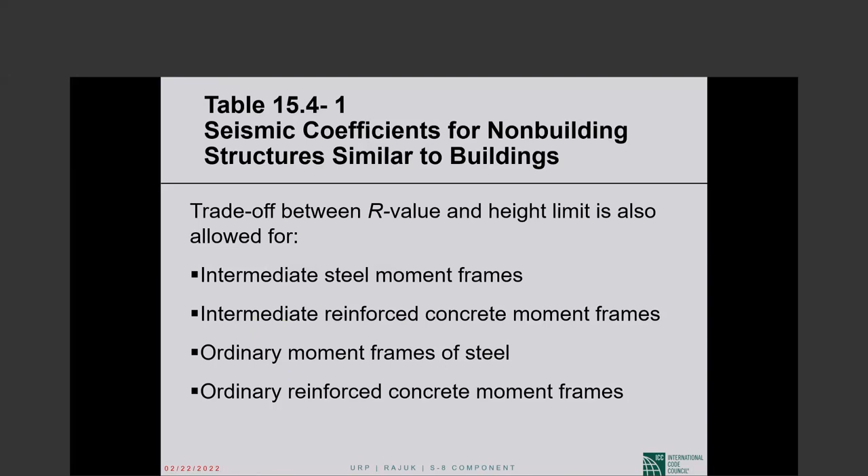Please take a look at table 15.4-1. Very interesting table, interesting things are happening in there, for non-similar to buildings. You still have to look at 15.4.1, where it directs you.

The R, omega sub 0, and C sub D now come from table 15.4-2. The design base shear equations are the same, but the minimums are not the same, as I'll show you.

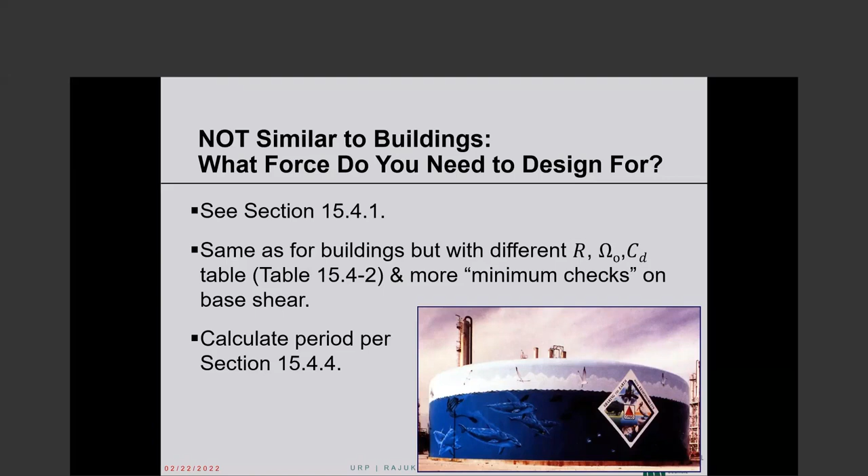And the period calculation cannot be this. It is not the same as for buildings. Basically, you cannot use the approximate period that we use in building design. That is not allowed by chapter 15.

So these are the design base shear equations that you are all familiar with by now. This is the descending branch, period dependent. This is the upper bound. This is the constant displacement part of the spectrum starting at T sub L.

Now the lower bound, remember 0.044 S sub ds I times W, but never any lower than 0.01. Here it is 0.03. This is a much higher minimum for non-building structures not similar to buildings. And the near fault minimum, I don't remember exactly what it was, is also different here for non-building structures not similar to buildings. This minimum applies only where the mapped long period quantity is larger than or equal to 60% of G, which is the rough equivalent of old UBC seismic zone 4.

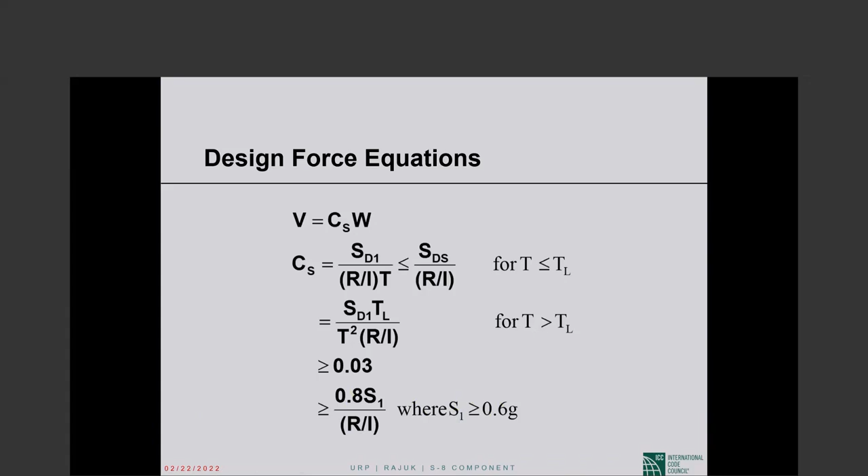For non-building structures, we use I, not I sub P. I is the importance factor. It is given in section 15.4.1.1, which references table 11.5-1, where the seismic importance factors are given for structures. I is either 1, 1.25, or 1.5, as for building structures. No difference. This is not I sub P.

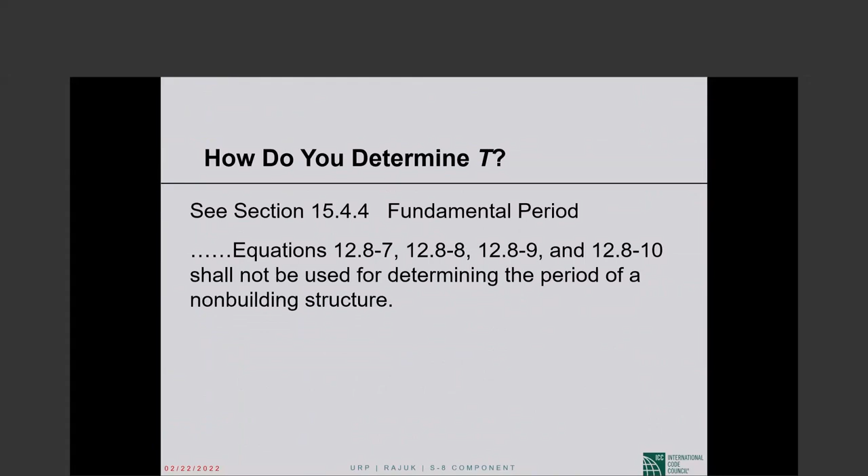Period computation: how do you determine T? The approximate period formulas do not apply. That's pretty much what this is saying. So this is the requirement for period determination for non-building structures.

The fundamental period of the non-building structure shall be determined using the structural properties and deformation characteristics of the resisting elements in a properly substantiated analysis. The eigenvalue analysis that we talked about involves stiffness assumptions as indicated in the relevant section.

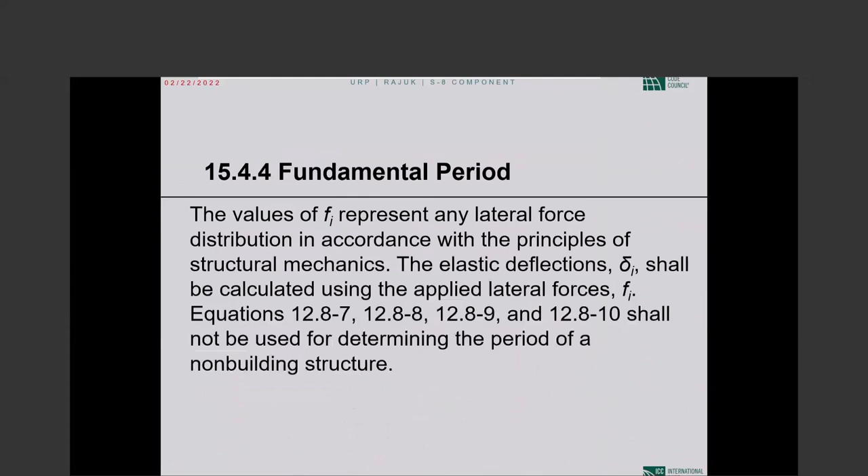The values of F sub I represent any lateral force distribution in accordance with the principles of structural mechanics. We typically take the design base shear distributed according to the code prescription, but you don't have to. You shouldn't have a high force at the base and a low force at the top, that is not in keeping with the principles of mechanics.

Anyway, the F sub I are the forces, delta sub I are the displacements obtained for those forces from elastic analysis, and W sub I are the seismic weights at the various floor levels.

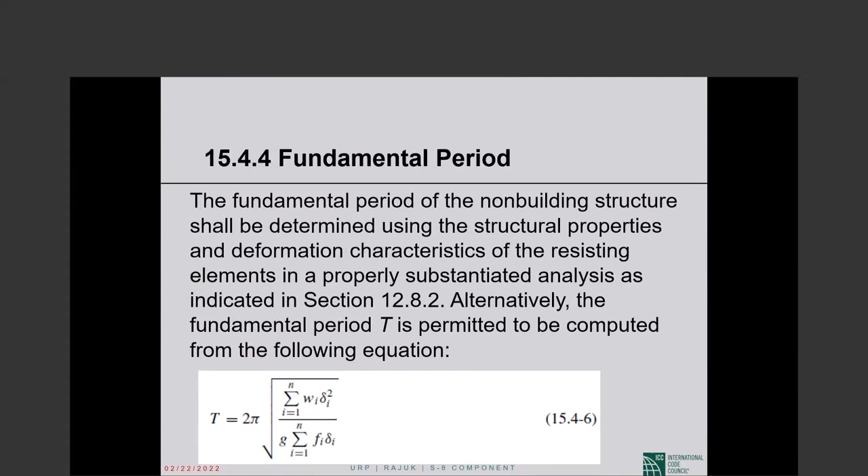So with this equation, the main thing is the approximate period formulas are not allowed. It has to be a rational period determination, which you can do on the computer using eigenvalue analysis, or if you want to do simple hand calculation, it is the Rayleigh-Ritz formula you can use. When I say hand calculation, the delta sub I has to come out of analysis, but then you can find the period by basically manual calculation.

The particular non-building structures for which ASCE 7 chapter 15 gives provisions are pipe racks. These are all important, very important things: steel storage racks, electrical power generating facilities, towers supporting tanks and vessels, piers and wharves that are accessible to the public. If those are private piers, then they are not covered by ASCE 7.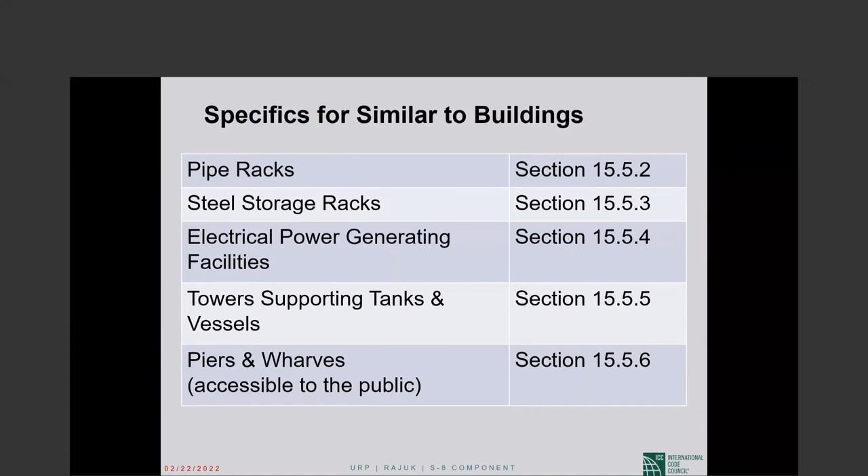This list is all similar to buildings: pipe racks, steel storage racks, electrical power generating facilities. Not all of them are necessarily similar to buildings, but those that are similar to buildings are covered, such as towers supporting tanks and vessels, piers and wharves.

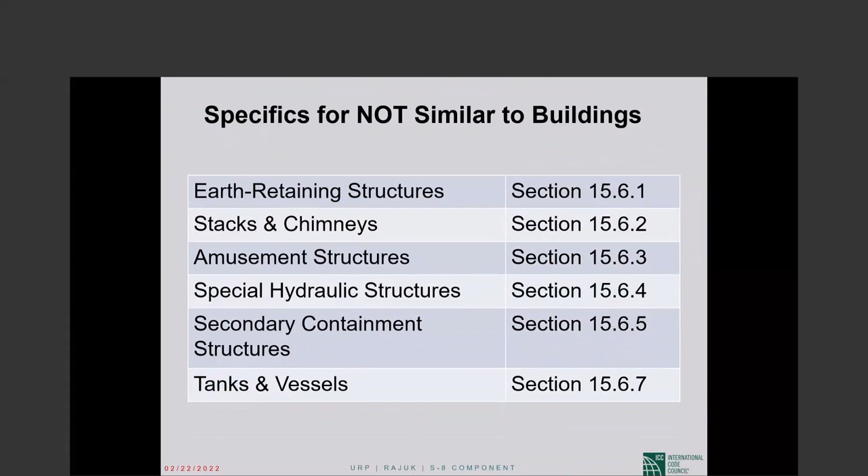Specific items covered in ASCE 7-05 that are not similar to buildings: earth retaining structures, stacks and chimneys, amusement structures, special hydraulic structures, secondary containment structures, tanks and vessels. That's the section I was telling you has grown to the point that I can't even believe.

There is a section on drift limitation for non-building structures. The drift limitations of section 12.12.1 for buildings need not apply to non-building structures if a rational analysis indicates they can be exceeded without adversely affecting structural stability or attached or interconnected components and elements such as walkways and piping.

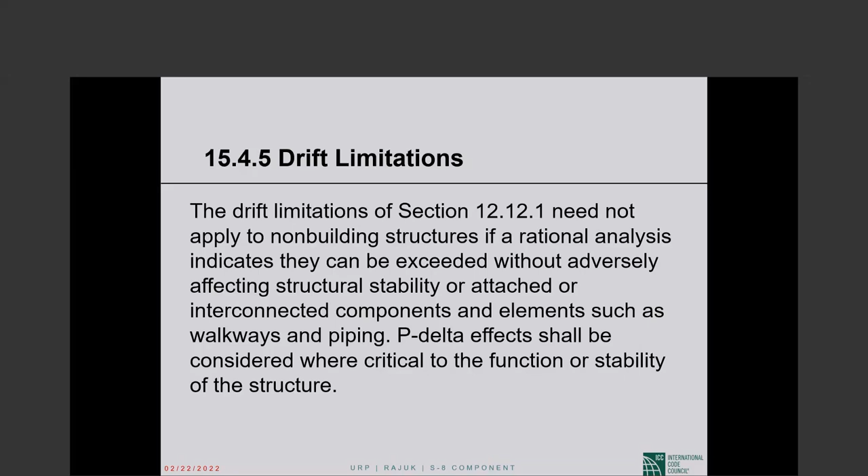Without adversely affecting attached or interconnected components and elements such as walkways and piping - if you can show that large deflections will not have adverse impact on walkways and things, then the drift limit for buildings does not apply. P-delta effects shall be considered where critical to the function or stability of the structure.

Okay, the final segment - this is not final. I have a little example at the back, which I probably should have put after the non-structural component, but anyway, it doesn't matter. Let us look at this.

What is it? Non-structural component or non-building structure? Quite often, it's not that clear-cut. Susan Dowty, who worked with me for quite a while, she wrote a paper some years ago with Bob Bachman, who is one of the authorities in this field. Much of what you see in ASCE 7-05 for non-structural components in particular are because of Bob. Anyway, the two of them together wrote a paper, and the slides are basically out of that paper to provide an idea to engineers on this important topic: non-structural component or non-building structure.

So non-structural components covered by chapter 13 are the specific items listed here, and there are a lot. Non-structural components are on the left-hand side, non-building structures not similar to buildings are on the right-hand side circle, and there is no question that these things - amusement structures, hoppers, monuments, silos, storage racks - these are non-building structures.

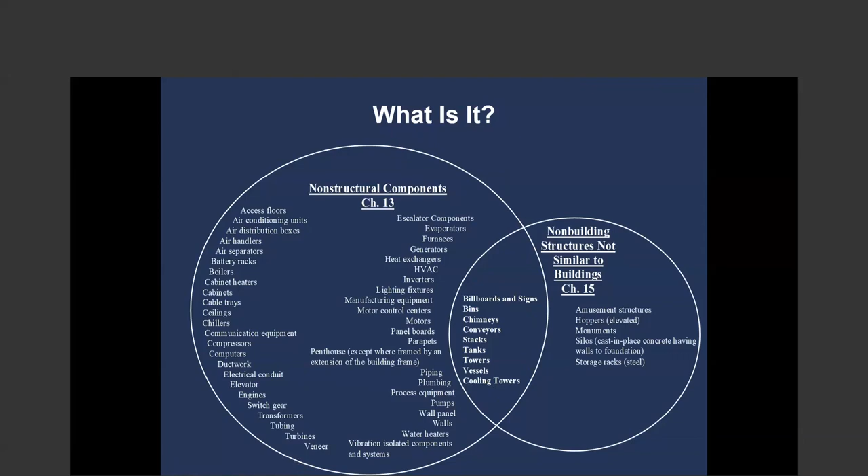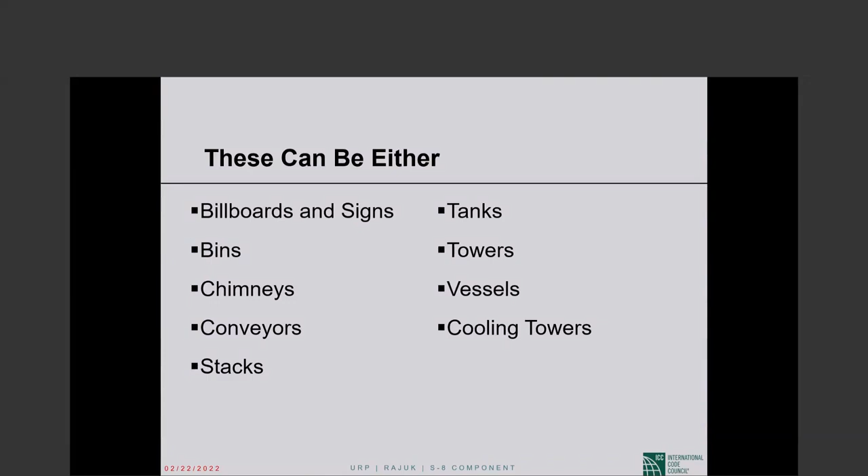The question is about this intersection - chimneys, conveyors. They can be non-structural components or non-building structures. So these can be either: billboards and signs, bins, chimneys, conveyors, stacks, tanks, towers, vessels, cooling towers.

So what are some of the differences between non-building structures and non-structural components? Susan thought that a warning should be issued to the viewers: what you are about to see is for guidance only. Generalizations have been made, and generalizations do not always apply. In applying these guidelines, common sense is necessary. These are definitely not hard and fast rules - just suggestions to set you on the right path.

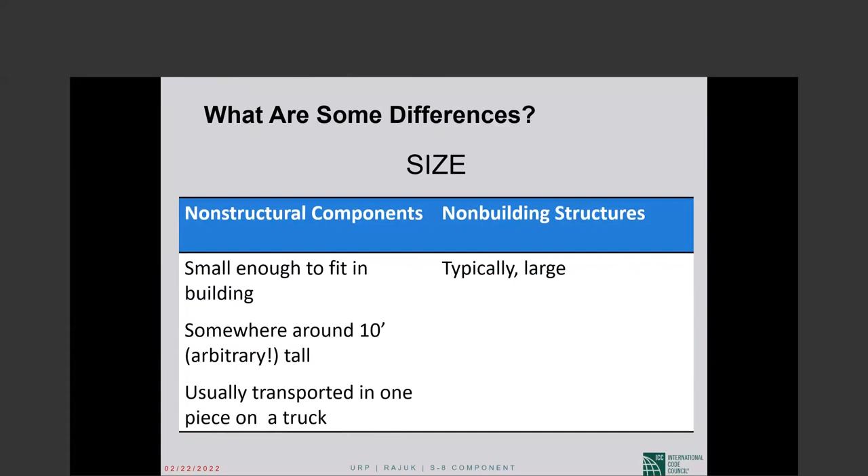So what are some of the differences based on size? Non-structural components are small enough to fit in a building, somewhere around 10 feet tall - the 10 feet is totally arbitrary - usually transported in one piece on a truck. Non-building structures are typically large, not always, but typically.

The designer always has the option of calculating both ways. You can take the same thing as a non-structural component designed by chapter 13, redesign the same thing as a non-building structure by chapter 15, and take the more conservative answer. That is always a choice, though I do not know that too many people exercise this choice.

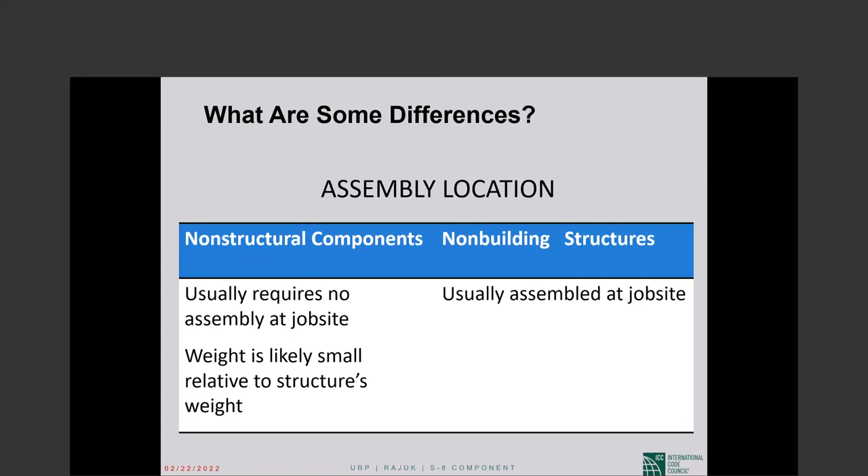Going on with differences based on assembly location: a non-structural component usually requires no assembly at job site, and its weight is likely small relative to the structure's weight. A non-building structure, on the other hand, is usually assembled at the job site, largely because of their size.

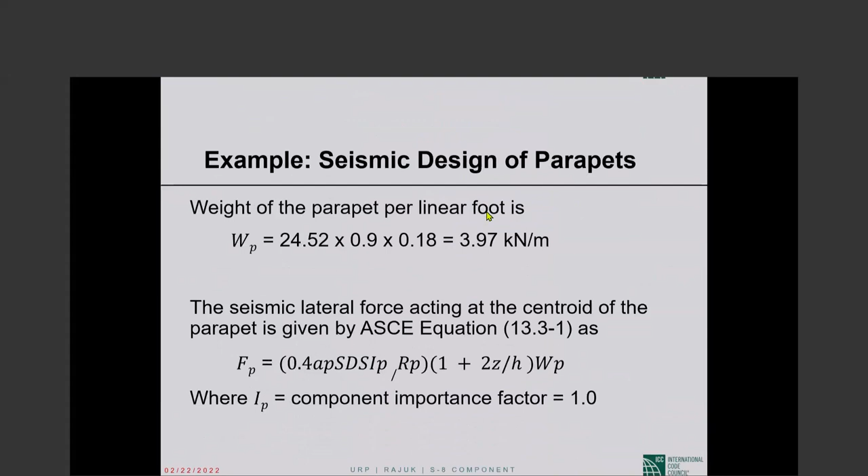Weight of the parapet per linear foot is 24.52 times 0.9 times 0.18. I don't know that everything is presented in the problem statement. Let me see.

No, I did not give you the other details. Okay, so accept that to be the weight, 3.97 kilonewtons per meter of this parapet.

The seismic lateral force, which would act at the centroid of the parapet, is given by ASCE equation 13.3-1 as F sub P equal to 0.4 A sub P, S sub ds, I sub P divided by R sub P, 1 plus 2z over h, times w sub P. You have looked at that equation a number of times. We will use that equation now.

Our I sub P is equal to 1. It's a parapet. It doesn't serve any essential purpose. S sub ds is 50% of g. That is kind of part of the problem statement.

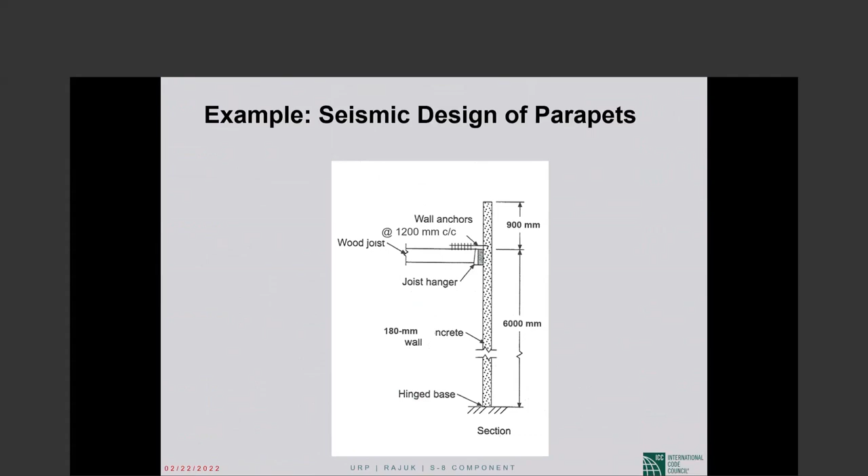The H, height of roof above the base, is 6 meters. That was given in the problem statement. This 6,000 millimeters here. Okay, so that is H,

and Z. Z, remember, is height to the location where the component is attached. The parapet is attached to the structure at the roof level. So our Z is also equal to H, is also equal to 6 meters. This is like a roof mounted equipment. Parapet is mounted on the roof or attached to the roof.

R sub P, component response modification factor. If you go to the table 13.5-1, where we found A sub P of 2.5, the R sub P is also 2.5. So now we have everything that goes into this equation.

0.4 A sub p, S sub ds, I sub p. So 0.4 A sub p is 2.5, S sub ds is 0.5, I sub p is 1, divided by R sub p of 2.5, and then 1 plus 2 times z over h. Z is 6 meters, h is 6 meters, times w sub p.

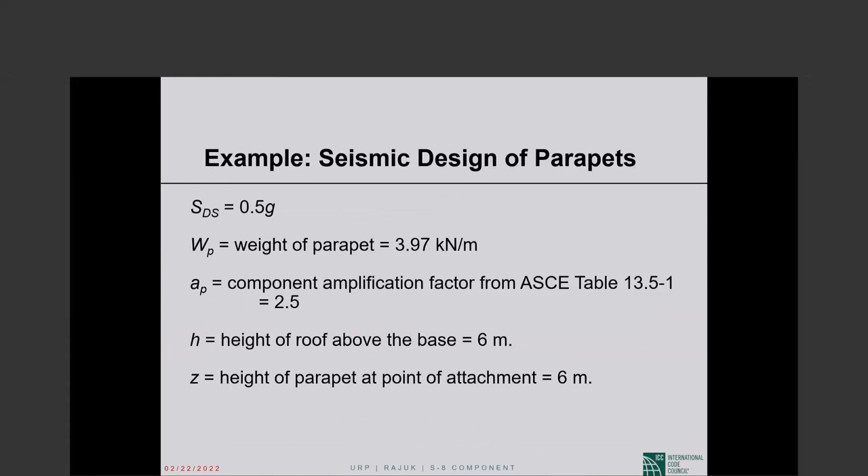All of that gives us 60% of the weight. The weight we said is 3.97 kilonewton per meter. So 60% of that would be 2.38 kilonewton per meter.

There is a minimum on the F sub P below which you cannot go, and a maximum, remember, so those simply do not govern. So the governing F sub P is 2.38 kilonewton per meter.

This acts at the center of mass of the parapet, and the parapet is 900 millimeters tall. So the center of mass is half of that above the roof, that is 0.45 meter, times the 2.38 kilonewton per meter gives us 1.07 kilonewton meter of moment per meter length of the parapet. So for a 1 meter strip of the parapet, the bending moment at the roof level is 1.07 kilonewton meter.

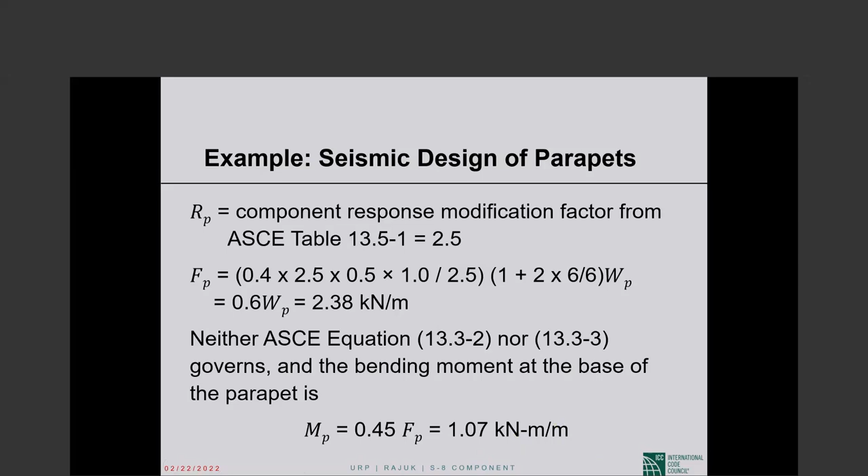So it's a very simple example. At the same time, I think it shows you application of the F sub P formula, which has multiple components in it.